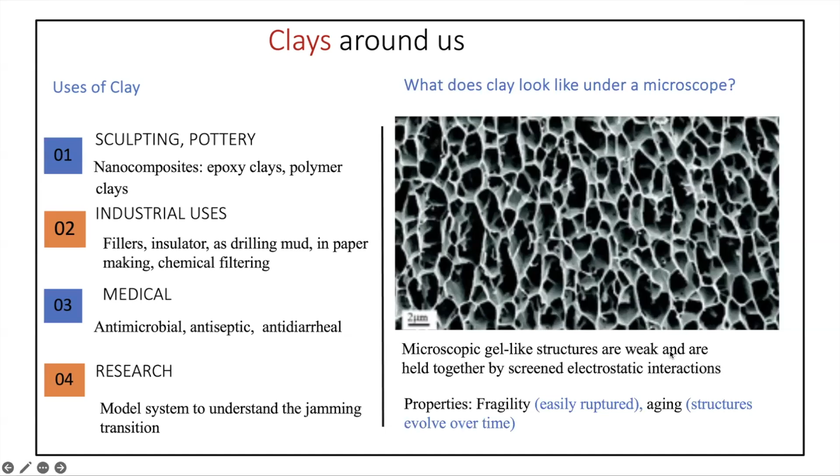So the two main properties of clay are the following. One is that it is a very fragile gel. It can be very, very easily ruptured because there are no physical contacts, but it is held together just by these screened electrostatic interactions. And the other very interesting property is that the gels age. That is, their structures evolve over time. So in the next few slides, I'll tell you why this aging happens.

So for our study here, as you know, you can have all kinds of clays. There's bentonite clay, there's kaolinite clay, but for the study here, we'll use Laponite clay, which is a kind of designer clay. It forms soft, glassy colloidal suspensions. They also age. They do exactly what other clay suspensions do, except that all the clay particles here have the same size. They are monodisperse. They are about 25 nanometers across and 1 nanometer wide, and it has a layered structure.

Clay is an inorganic macromolecule, and as you can see, it's a disk, and on the surface of the disk there are all these sodium ions. The green balls here are basically cartoons for sodium ions. And when you buy Laponite from, say, Sigma Aldrich, they're these clumpy materials, and they're not individual clay particles, but they form stacks like this. So this is an artist's impression of the aggregated particle stacks that clays form.

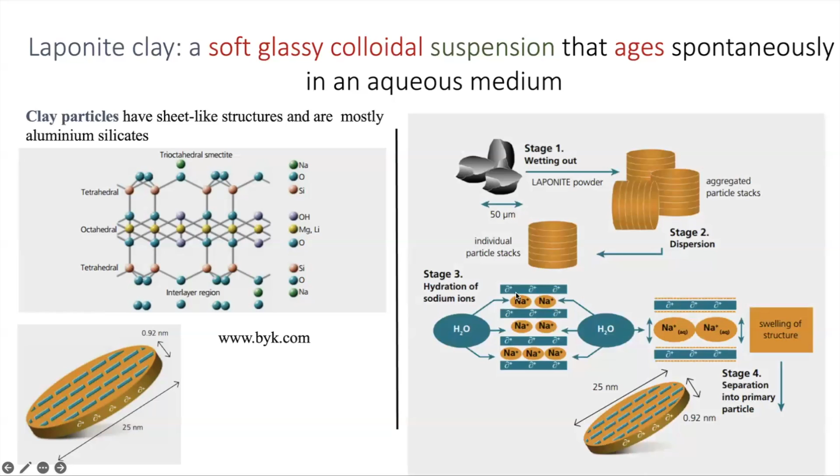And when you disperse these in water, the aggregated particle stacks break up into individual particle stacks. Now, remember, in the interlayer gallery here, you have sodium ions, right? So once you put this stack in water, there is an osmotic pressure gradient between the bulk water and the interlayer gallery.

So this results in swelling of the layer, and the sodium ions try to reach out into the bulk medium. So there is this swelling, and as the charge distributions continue to change in suspension, the clays in the tectoids, these one-dimensional stacks, continue to repel. They continue to repel because of screened electrostatic repulsion.

And the moment the screened electrostatic repulsion exceeds the van der Waals interaction between the two particles in the tectoid, the clay stack starts breaking up. This process is called exfoliation. And because of the combined effect of this exfoliation and, before that, the swelling, if you look at a clay suspension in a rheometer, if the content of clay is high enough, you're going to see that the elasticity and indeed the viscoelasticity of the suspension continues to build up over time for hours.

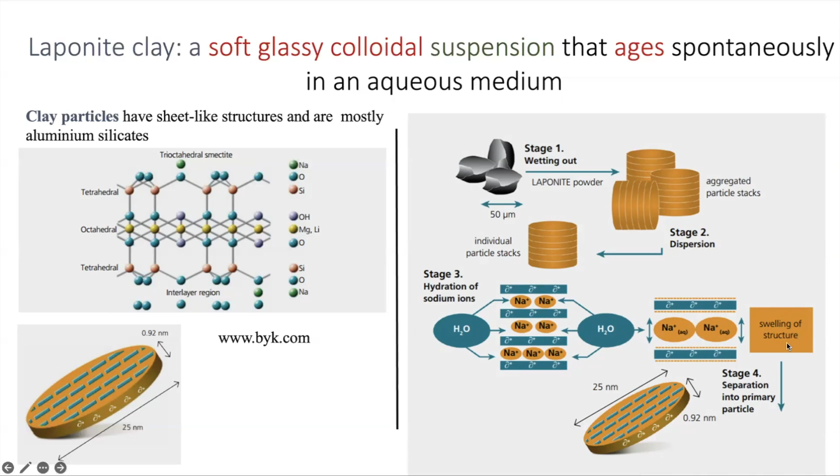And what I didn't tell you is that if the pH of the aqueous medium in which your clay particles are suspended is less than 11, there are these side groups which are magnesium, right? So the magnesia here gets hydrated. Therefore, you end up with particles which have negatively charged faces and positively charged sides. So when you have many such particles together in water, they can aggregate. These negative faces attach to the positive rims, and you can form these house of cards structures.

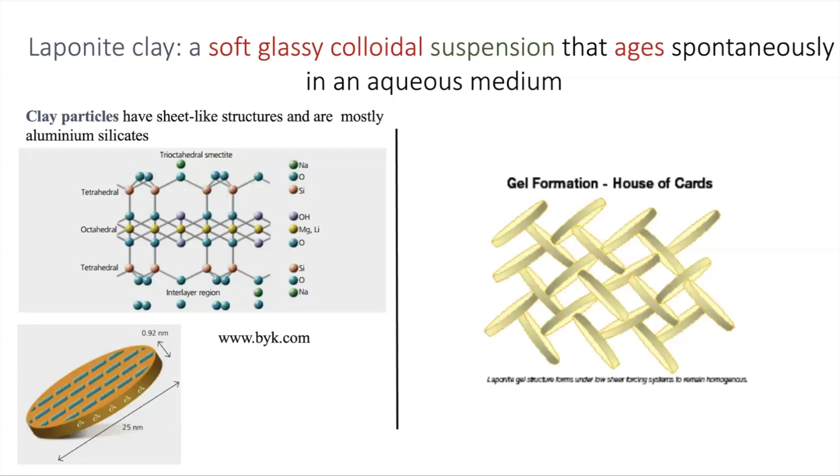And as these house of cards structures develop, as the charge distribution in the suspension changes, they eventually span the whole system. And you can actually see in a matter of hours that your clay suspension goes from a liquid to a solid-like state completely spontaneously. And indeed, we had made these measurements many years ago. So here I'll define this quantity TW, which we call the aging time. This is the time since preparation. So you just prepare the suspension and then you start measuring.

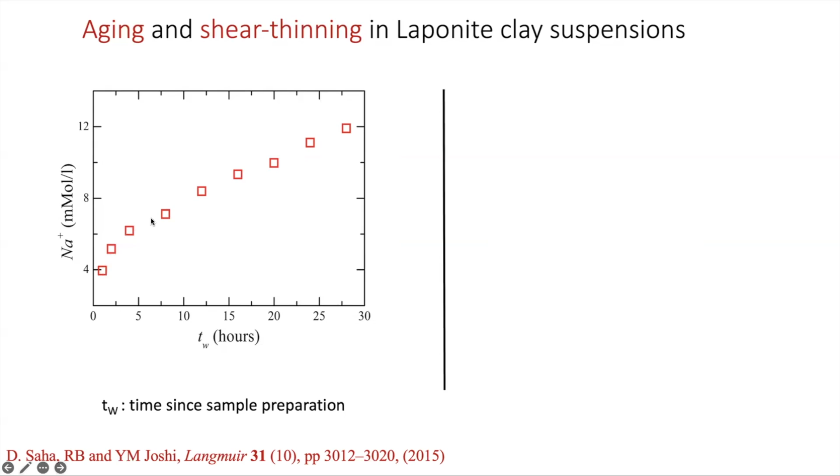What we've done here is we've measured the sodium ion content in the bulk water medium using a sodium ion sensor. You can also do this with conductivity, but then you have to assume that DLVO works, which may not be entirely true. But if you just measure the sodium ion content in water with the age of the suspension, you're not really disturbing the suspension, you're just letting it evolve, and you're measuring the sodium ion content in millimolar per liter. And sure enough, over here we have measured for 30 hours. You can see that the sodium ions continue to build up.

Okay. And what does a clay suspension look like? What does aging look like in the laboratory? When we first make a clay suspension, we just take the clay powder and disperse it in water. We also mix it up a bit and try to break up as many of these stacks as possible. Immediately after preparation, it's in a vial, nicely sealed to minimize evaporation. You can see the meniscus flows. If you look at the viscosity of this material, it's about 10 times more viscous than water, maybe 10 millipascal second at room temperature.

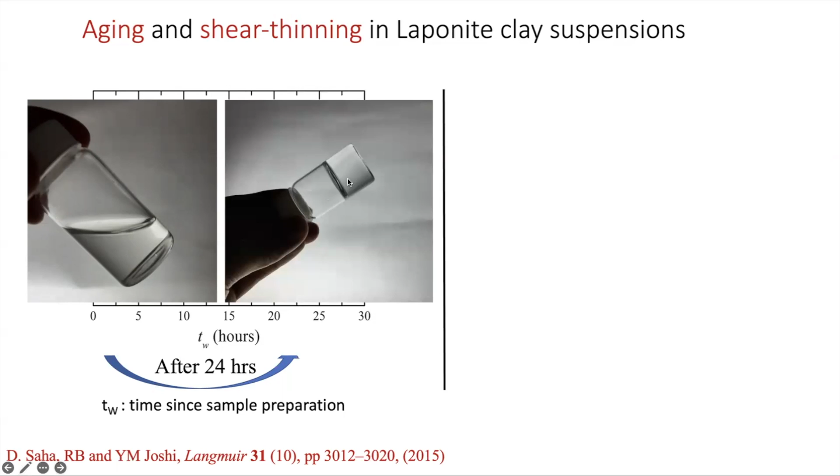And you can see it flows, but you make sure that this is nicely wrapped in parafilm. There's been very little evaporation and nobody has fooled around with the system. Come back after 24 hours and your material has become a solid. Here you can see one of us taking the same vial, turning it over, and the sample can actually support its own weight. So what you have got here is a transition from a liquid-like to a solid-like state with time, and it's a spontaneous transition.

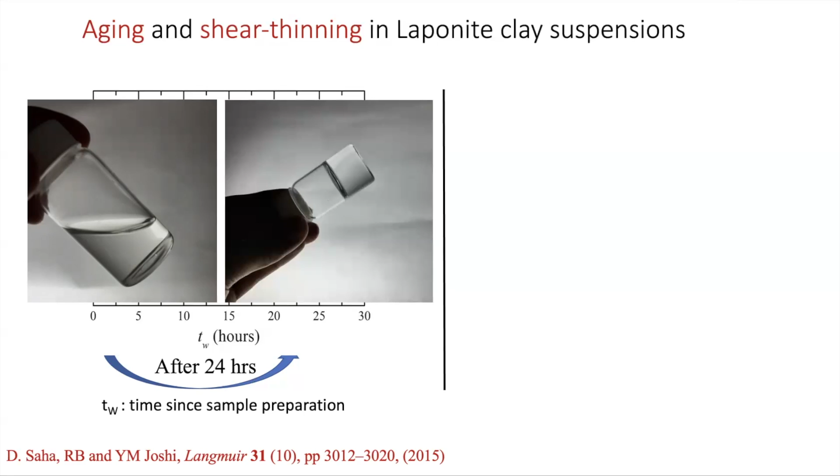So this is physical aging. This is happening because of the development of interactions in the suspension. Just like in biological aging, we age and we get wrinkles, our hair turns gray. Similarly, here the interactions evolve and you can actually go from a liquid to a solid. And there's a measurement that we did a little while ago, and I'll tell you more from this paper.

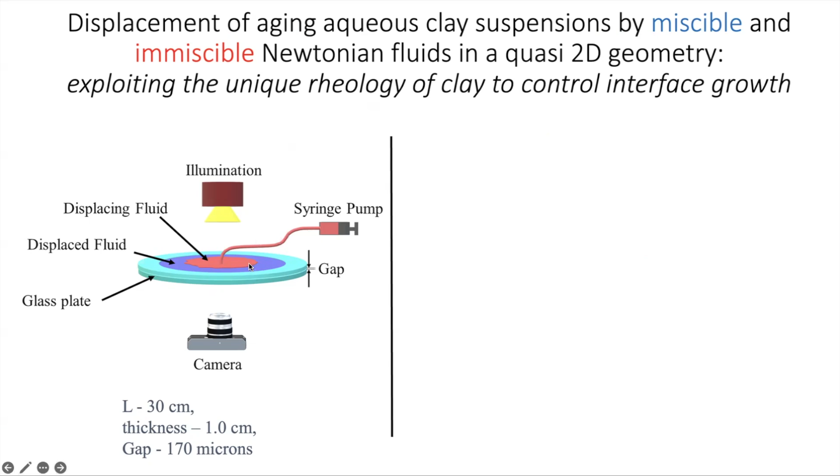And then we look at the growth of the interface. In most cases, the interfacial growth is unstable, and that is what we follow with this DSLR camera from the bottom. And so that our data looks good, we illuminate it from the top. And just to remind you, in this case, the displaced fluid is our soft, glassy laponite suspension, which is non-Newtonian. And not only is it non-Newtonian, it also ages. Its properties evolve with time.

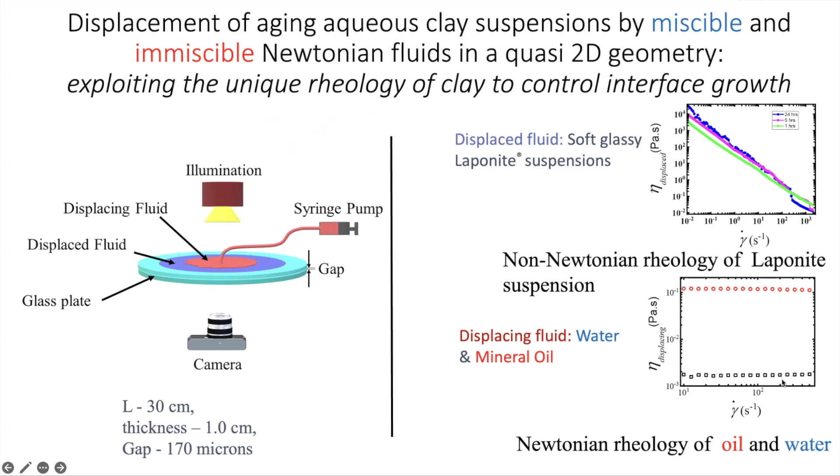Okay, so here's our data. This gray thing that you see here is the clay in the Hele-Shaw cell, but you're seeing it from the bottom because that's where the camera is. So I'm going to first show you what happens when dyed water invades the clay, and this is what I'm going to call miscible displacement. So let me just play this. The water is going to be injected at a constant flow rate of 5 ml per minute. And this is what we see.

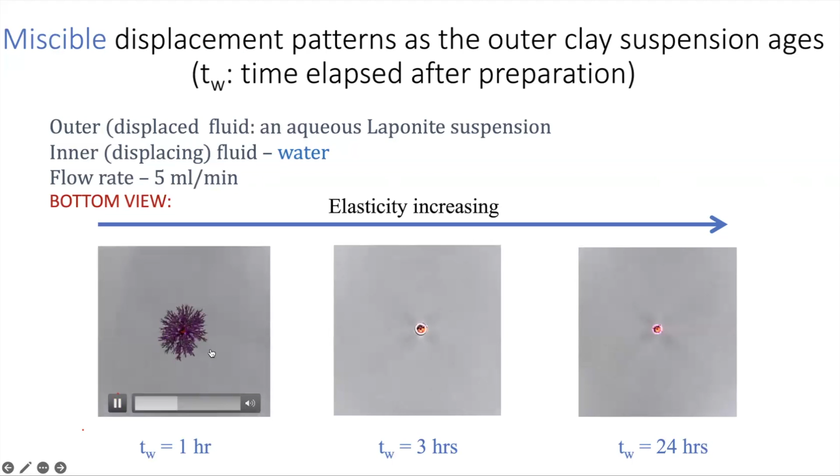Okay, we see this very dense viscous pattern that develops. If you look at it very closely, you'll see there are these narrow, thin branches that propagate, but they also keep merging with each other. Remember, the age of the clay here is very low. It is pretty much freshly prepared, so it is not very viscoelastic. It is rather viscous. So the viscosity mismatch is not very high between the water and the outside clay suspension. So what you end up with is what we call a dense viscous pattern.

There's no well-defined boundary, and these branches keep interconnecting because of the low viscosity of the outer clay here. And you form these little pools of clay inside. I just want you to notice this, because in the next image, what we've done is we've filled the clay in the Hele-Shaw cell and allowed it to age for 3 hours. So the clay here is a little more elastic than it was here.

Okay, and now let's get the dyed water to invade, and this is what you see. A very different pattern: a dendritic pattern with lots of side branches. In the dense viscous pattern, I know it was difficult to look at these features in this very quick video. There was a lot of tip splitting, but very little side branching. But the moment the elasticity of the phase outside increased, you see a lot more side branching, much of it towards the beginning of the growth of the interface. And here, unlike here, you can see very clearly defined interfaces.

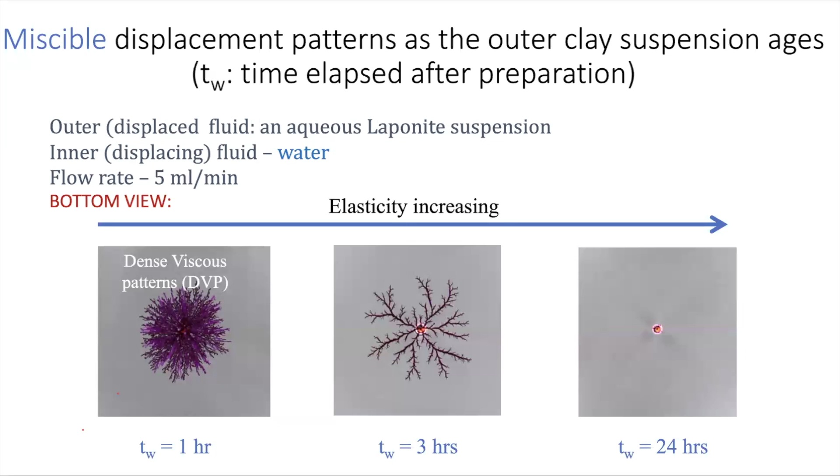Okay, and one word about side branching. The reason it happens is that the fluid outside, the clay, is shear thinning. As the water propagates into the clay at rather high velocities, it shear thins the clay at the propagation front, and that results in the finger propagating faster. But remember, the driving pressures on the water are also very high, so that tends to make the branch. So here's what we got when we had intermediate elasticity.

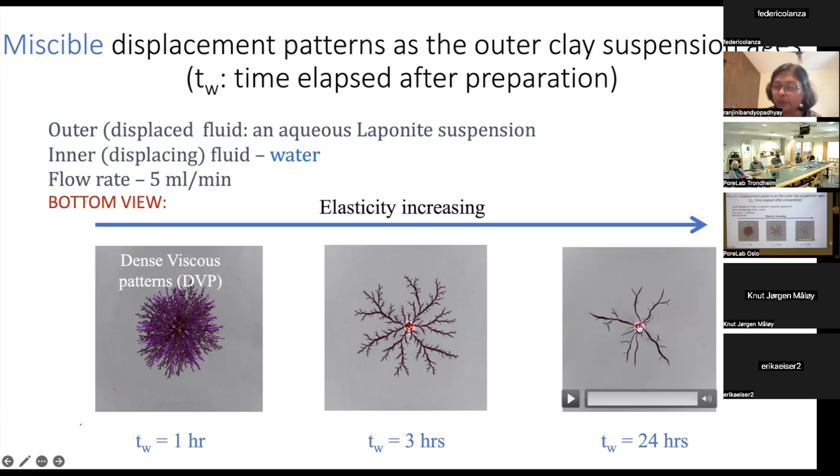Here we've loaded the sample and allowed it to age for 24 hours, 1 day. So this outside clay suspension is extremely elastic. Now we are going to inject the water, and this is what you see. You see cracks. This is exactly what I'd get if I took a stone and threw it on the glass, right? When you invade this very elastic, gel-like clay suspension with the water, initially there are these primary branches that form, just like in any crack propagation.

And after some time, you have these narrow perpendicular offshoots that develop. See how narrow these tips are, right? This is happening because as the water invades the clay, it is basically yielding the underlying clay networks. So there is yielding going on, a rearrangement going on, a lot of release of elastic stresses, and that is why you form crack propagation patterns like this, which we call viscoelastic fractures.

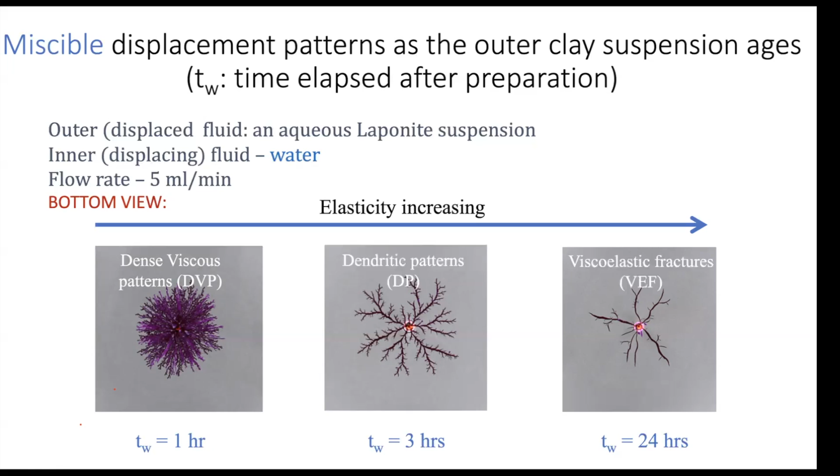So very similar cracks were also seen when aqueous foam was invaded with water. And foam, as you know, is a yield stress material.

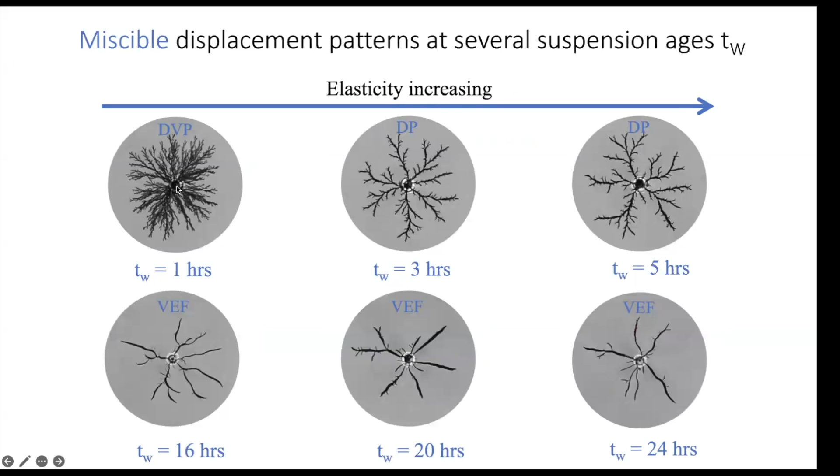Now we've repeated these experiments at many other different ages of the clay. And you can see that as the clay age increases from here all the way to here, so elasticity is increasing with time, you can see how the patterns gradually transform from these very dense viscous patterns through these dendritic patterns, and then ultimately we have these viscoelastic fractures.

Now, I've been telling you about miscible displacement. What happens when aqueous clay suspensions of different ages and hence different elasticities are invaded by water, which is miscible in clay. Now, what happens when you invade the clay not with water but with oil? And oil, as you know, doesn't wet clay, right? So there is this interfacial tension, which should have a stabilizing effect. So let me show you what happens.

So here again, we are going to use laponite, the clay suspension at 1 hour and 24 hours. I'm just showing you the two ends of the spectrum in clay age. And I'm going to invade the clay here at the same flow rate as I did the water. And this is what you see.

So initially, because of the stabilizing effect of surface tension, you have this very uniform growth of the front of the interface. You have a very stable interfacial growth. And now you can see as shear thinning takes over, you can see some undulations growing. And as you can already see, this is way slower than what we saw when you were invading the clay with water.

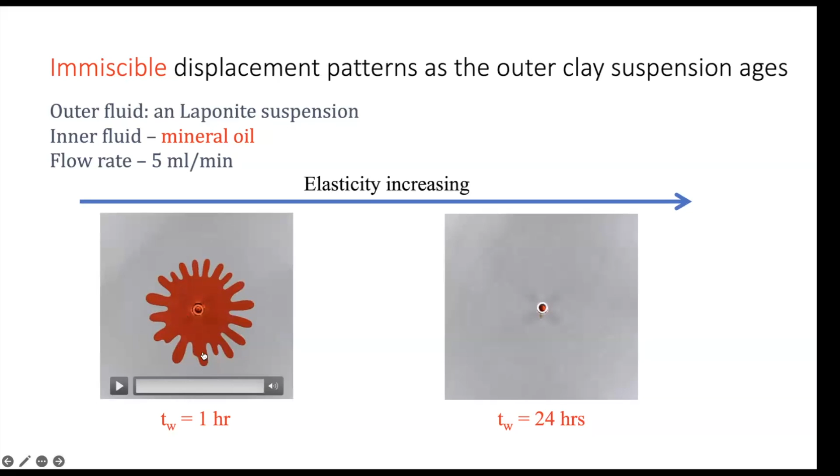So I'm going to speed it up. And this is what eventually the pattern looks like. It reminded us of a flower, so we call this a flower pattern. Okay, so this is when the clay was shear thinning. It was still much more viscous than it was elastic.

But remember, the mineral oil had a lower viscosity contrast with water. And along with that, you have the stabilizing effect of surface tension. So you end up with a pattern where the coverage is much, much better than what you got for the miscible displacement experiments. Now here, we've aged the clay up to 24 hours, and then the oil is going to invade the clay, and this is what you see.

You see what we call jagged patterns. Okay, so again, with these jagged patterns, as you can see, you don't get the kind of stable growth that you initially got. And that is because of the elastic instability, which is present from the very beginning because of the very high elasticity of the surrounding clay medium.

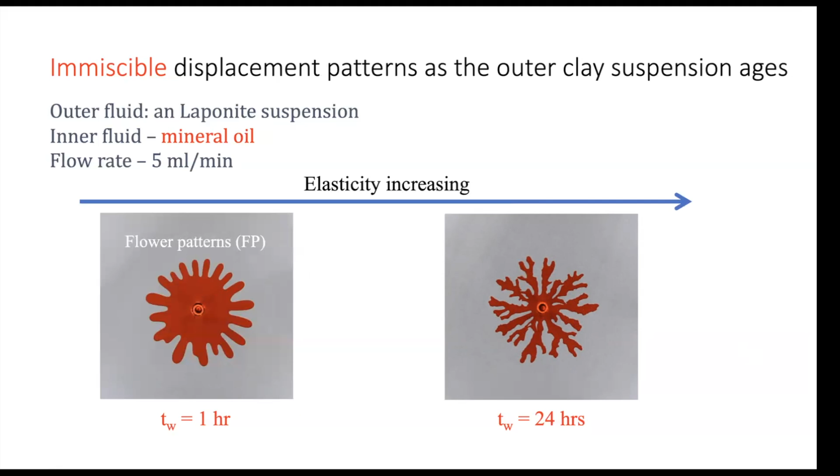So now let us just do some analysis of the data. So here, U bar is the speed of the longest fingertip that we have measured using videography. And here you see that as the age of the clay increases for miscible displacements, the speed of the fingertip really becomes faster as you go from the dense viscous pattern to the viscoelastic fracture pattern.

But when the interfacial tension was not zero, when you use mineral oil, you can see that firstly, the fingertip speeds are extremely slow when compared to what you got for the miscible displacements. But they also do not really change with the age of the clay suspension outside.

So what we've done here is we've calculated a shear rate of invasion. We have assumed no-slip boundary conditions and a parabolic profile of the invading fluid in the gap, and we have used this approximation. So B is the thickness of the gap.

And with that, we see that the miscible fluid, the water, invades the clay at shear rates that are between 34 to very big shear rates, like 550 per second. But for the oil, the shear rates are much, much lower. And this is, of course, because of surface tension.

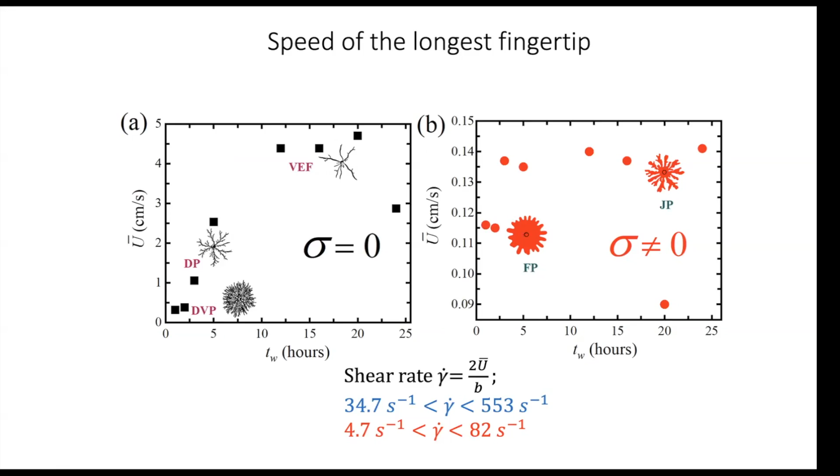Now, we've done some analysis, but I think to save time, I'm not going to be able to tell you everything because of all the technical difficulties.

So what we've done here is we have quantified the morphologies of the patterns by proposing a parameter which we call the areal ratio. So the areal ratio is basically the coverage area of the pattern divided by the area of the smallest circle that encloses the whole pattern when the longest finger has reached a particular radius R. In this case, we've just arbitrarily defined a radius capital R of 7 centimeters.

We've also looked at this annulus here between the radii small r and big R, and we've calculated two other parameters. One is the average width of the branches in this annulus, and also the average frequency of the branches. How many branches do you have over this whole annulus? Okay.

And here are the patterns that we formed. This is with surface tension 0. This is with surface tension not equal to 0. This is the development of the patterns as the age of the clay increases. And we've calculated the areal ratio for all the experiments that we've done. And you can see that the black points here are for the miscible displacements.

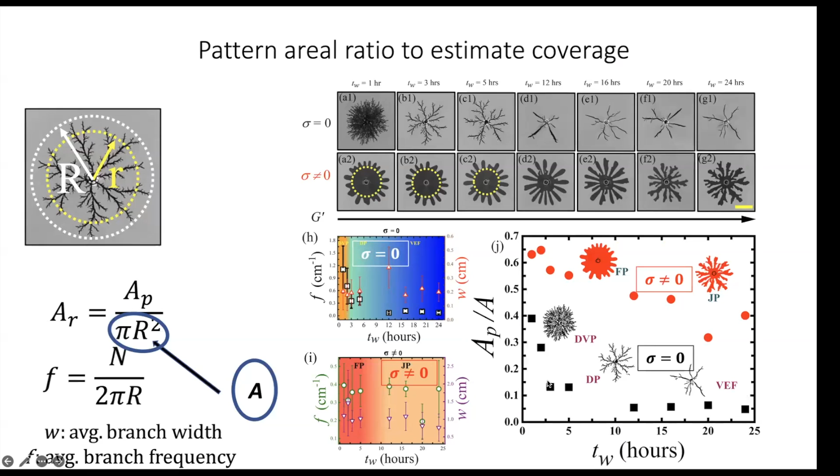And as you can see, the coverage of the miscible displacement patterns is much, much smaller than the immiscible displacement patterns. So sure enough, the areal ratios are much lower for the miscible displacements than they are for the immiscible displacements.

Okay, so now we've done a related experiment. So far all the data I've been showing you has been taken at a constant flow rate of the injected fluid, that is the oil or the water, but we've changed the age of the clay suspension. But here we have changed the flow rate, but we have kept the age of the displaced clay suspension fixed at 24 hours.

And obviously, as you increase the flow rate Q, what you're doing is you are just shear thinning the medium outside. So Q here is the flow rate, going all the way from 1 ml per minute up to 50 ml per minute. So far I was showing you data here at different ages.

Okay, so as you change the shear rate on the clay suspension by increasing the volumetric flow of the Newtonian liquids, you can see that you get the same sequence of patterns, but in the reverse direction, right? Because as you increase the flow rate, the viscosity of the clay, the elasticity decreases.

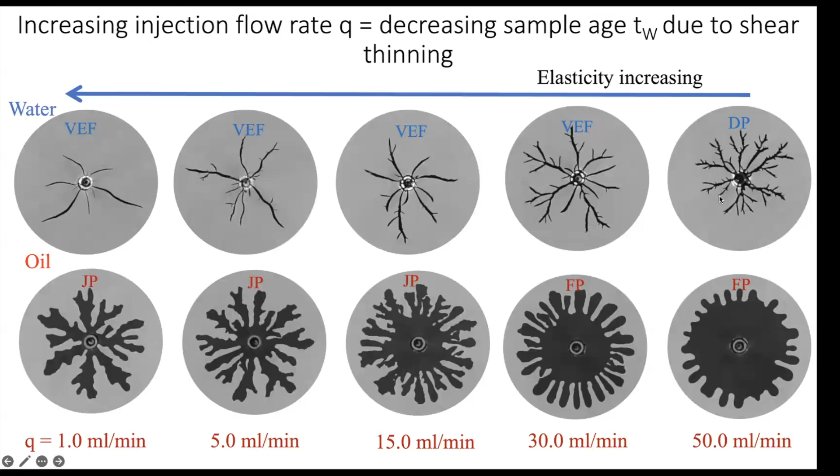You are shear thinning the outer clay suspension at very high flow rates by breaking up all the structures, because you're imposing very, very large velocities on the outer clay suspension.

Okay, so we've done a similar kind of analysis where again we've looked at the coverage of these patterns as you change the flow rates. So here are the patterns that we got for different flow rates and also for the different miscibility conditions. And we've plotted here the coverage ratio as I defined it earlier.

We've also looked at the branch frequency and the branch widths, but I'm not going to talk about it because it's been 40 minutes already.

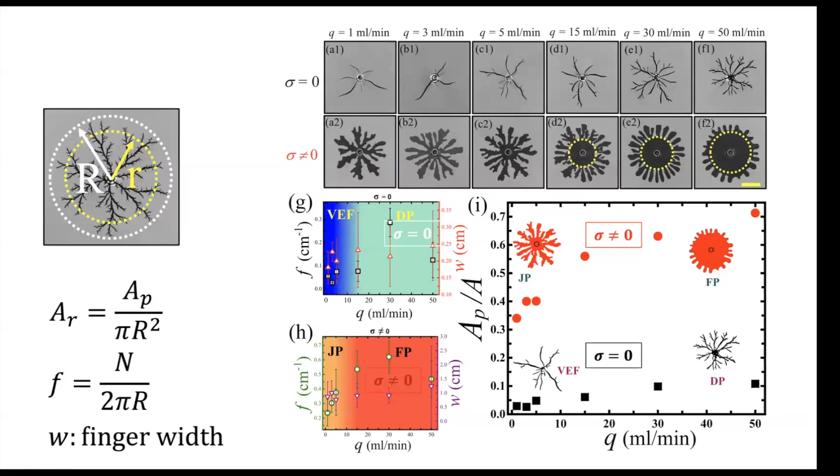So what we see here again is that you get exactly what you got when the flow rate was constant but the age of the outer clay suspension was increasing, but you get it in reverse. Okay. So then we've calculated the viscosity ratios, because we just wanted to see what the contribution of the viscous instability was.

So we've calculated the viscosity ratios. We know, of course, the viscosity of the water and the oil, but because the viscosity of the outer clay depends on the shear rate, we've measured the viscosity of the clay suspension at that age, at that particular shear rate, in a rheometer.

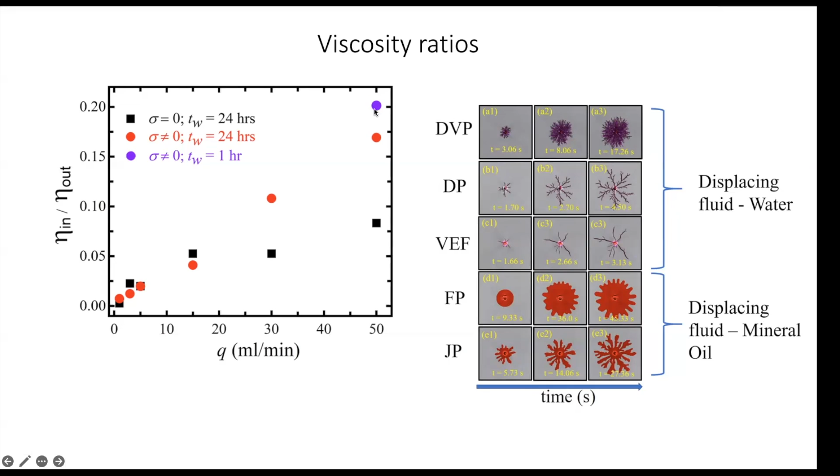So this is for a very low age of the clay here, and at a very, very high flow rate of the oil that we've injected here, the red fluid. As you can see, we've watched it for a very long time. We have a beautifully uniform front that propagated. So that is this point, which, as you can see, has a very high viscosity ratio. So what we are doing is we are suppressing the viscous instabilities here.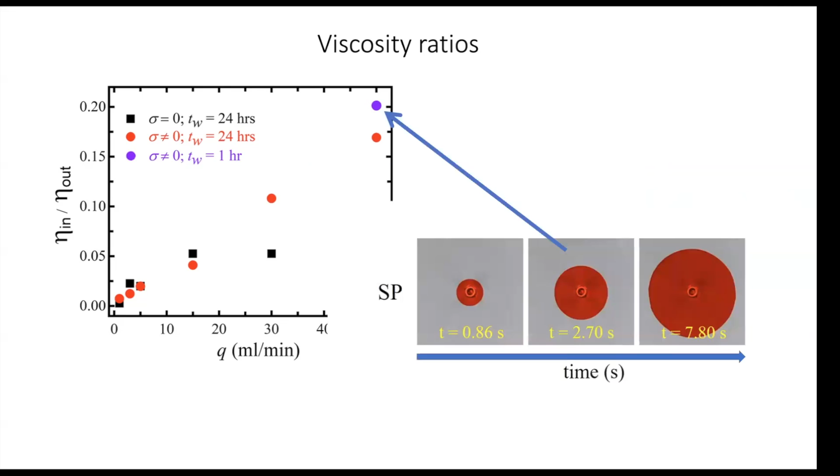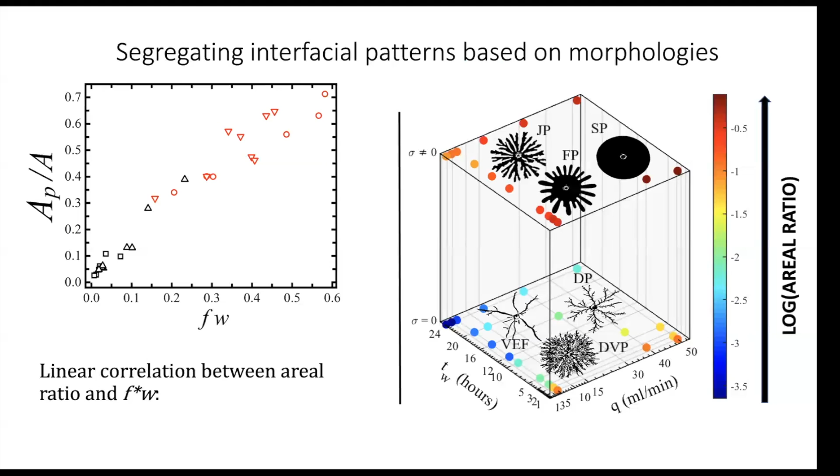So our control parameters here are the age of the clay suspension that we are displacing, the displacing fluid injection velocity, and of course also the interfacial tension. We can control the patterns that form even when the fluid pair is the same. In this case, the fluid pair is either clay and water or clay and oil.

So then, just to see how these patterns were being selected, we looked at the growth of these spatio-temporal patterns to see if we can come to some conclusion about the final pattern morphologies that were being selected. So here you see this color scheme. The colors have a one-to-one mapping with the propagation time of the pattern.

So blue means the pattern very early on, and the redder it gets, the more developed the pattern is. So for the dense viscous pattern, you can see the tip splitting that is happening here. And what we've plotted here is the areal ratio versus the normalized time for the fully developed pattern to grow. So these are the blue data points here. That's the coverage ratio. And this is the speed of the longest finger. And I'm not going to go into the areal ratio because there's not a lot of time.

But what I want you to see is that as time progresses, what you achieve is a regime of steady growth. So look at the brown points here. You see that at longer times, you have steady growth. So the pattern is growing in a steady way, right? And the same for the dendritic pattern. So here we have the longest finger propagating, that's the velocity. And you can see even here eventually you have steady growth of the pattern.

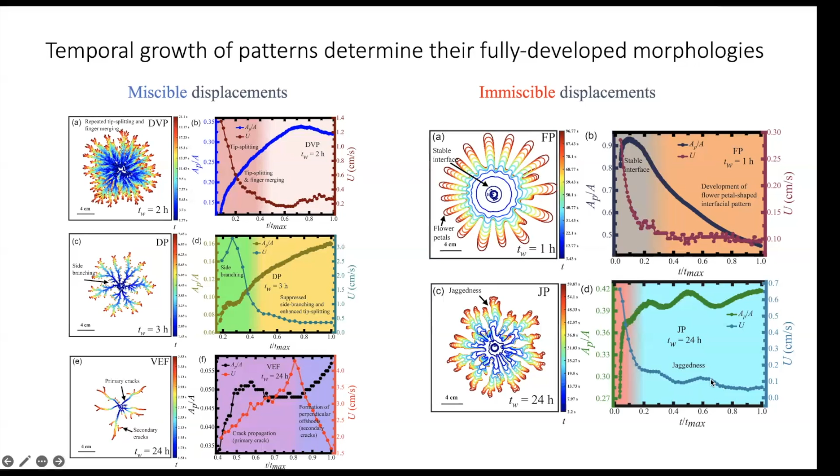But for the jagged pattern, when you invaded the highly elastic clay with oil, then you see this waviness in the velocity, and that is because this intermittent dynamics at the interface arise because of the breaking up of structures. Okay, the oil has to break up structures in its path, and as a result of that, you see this kind of waviness.

And here again, we just kind of segregate all the patterns based on the velocity of the fingertip. So what you see here are the miscible displacement patterns. What you see here are the immiscible displacement patterns. And sure enough, the speeds of propagation of the longest finger are very, very different depending on the time and shear rate dependent rheology of the outer viscoelastic clay suspension, and of course the miscibility of the fluid pair and the flow rate of the displacing fluid.

Okay, so the take home message here is that by changing the suspension age and the displacing fluid flow rate, we have been able to actually use these control parameters to tune the growth of unstable interfaces and for the selection of patterns when viscoelastic aging clay is invaded by oil or by water in separate experiments.